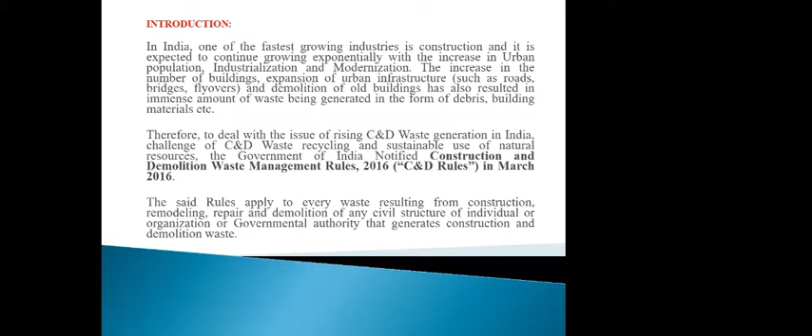The said rules apply to every waste resulting from construction, remodeling, repair, and demolition of any civil structure of an individual - that may be any individual house, organization, or government authority that generates construction and demolition waste. We have to know this rule, otherwise we cannot achieve sustainable management of the environment. To go for sustainable management, there is an act, there are rules, we should follow that, then only we can go toward sustainable life.

So in these rules, what are the objectives? The objectives of the construction and demolition waste management policy - henceforth I will call it C&D waste management policy - are to ensure that no C&D waste is dumped in open space by 2023. As per the rules, wherever waste is generated from construction or demolition, that waste has to be disposed of in a designated area by the end of 2023.

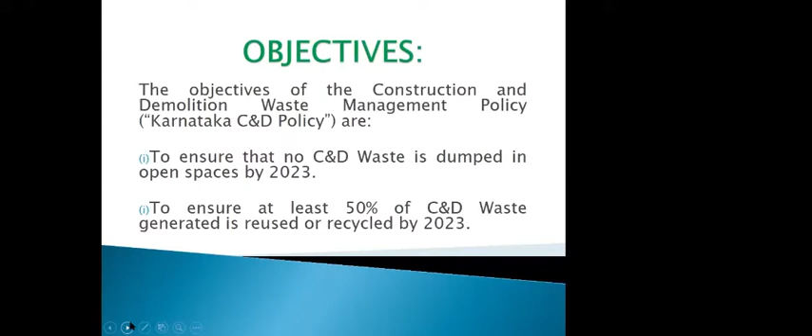Another objective is to ensure at least 50% of C&D waste generated is reused or recycled by 2023. That means a minimum of 50% of the waste has to be disposed of - that is, recycled or reused properly - in a phase-wise manner.

C&D waste impact on environment. Friends, as we know, due to urbanization, civilization and modernization, we are destroying the environment and utilizing natural resources for our livelihood. So what is the impact on environment of this C&D waste? I'll go through it in detail.

Indiscriminate dumping of C&D waste is visually annoying and conveys poor enforcement of C&D waste management in a city, as we observe every day in our city and its outskirts. Due to lack of options for dumping in designated sites, low-lying areas, abandoned quarries, vacant plots, or sometimes even the outskirts of the city often become targets for dumping debris from construction and demolition waste, in the city or outside it.

Often C&D waste is dumped on roadsides quietly by C&D waste generators. Whoever generates the C&D waste simply disposes it in a nearby vacant place, all along the roadsides, or along the backside of rivers.

Private contractors remove waste to privately owned low-lying land for a price. For example, if I am going to construct a small house, whatever waste is generated during demolition or construction, I will give it to a private party, a truck or tractor operator. That person, for the sake of earning money, will go and dump it on vacant land or vacant sites, or all along natural canals, or more commonly dump it in an unauthorized manner along roadsides or other public land.

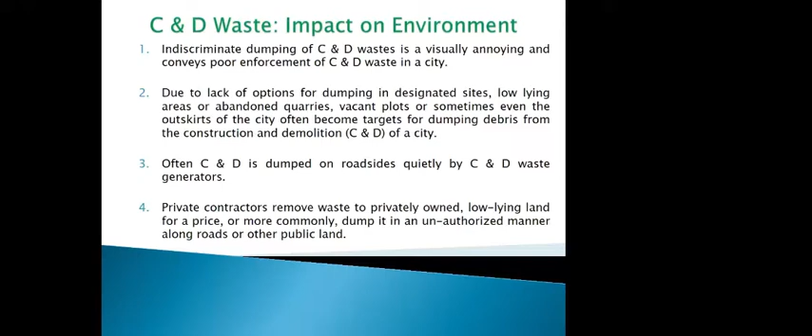C&D debris - that is, waste - is being indiscriminately disposed along river banks or dumped in drains, that is, natural nalas, which hampers flow, thereby encouraging mosquito breeding due to stagnant sewage or water, or causing floods.

Sometimes a person unknowingly disposes solid C&D waste along natural nalas. During the rainy season, it obstructs the natural flow, which may lead to floods.

Cases of reported C&D waste are used to illegally fill up water bodies and wetlands around urban centers for creating land for real estate development. This is something we hear about every day - land developers filling nearby unauthorized lakes, meaning lakes that nobody even knows about.

So that fellow will fill the debris year by year, and one fine day he will say that this is my land. Afterwards he will create a land for selling to some of the people, and there are disputes - this is what we are observing day to day in our surrounding areas.

C&D waste forms a part of solid waste, municipal solid waste. This C&D waste is a part of the solid waste, and it gets disposed in landfills. That means the municipal solid waste also contains this C&D waste, as this is the cheapest option for disposal of C&D waste.

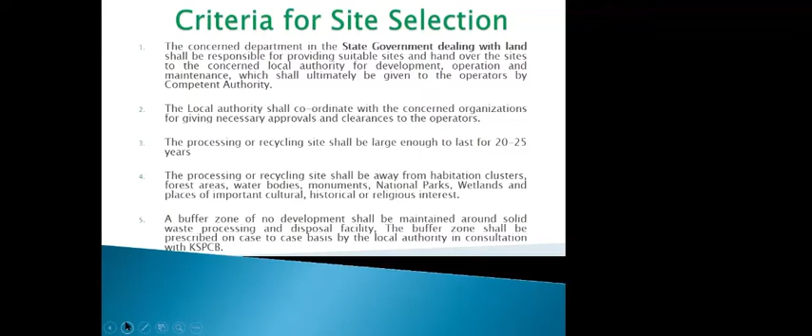A buffer zone of no development shall be maintained around the solid waste, that is C&D waste processing and disposal facility. That means we have to keep a buffer zone of maybe 500 meters or 1 kilometer, depending upon the city, so that there shall not be any obstruction to future development. The buffer zone shall be prescribed on a case-to-case basis by the local authority in consultation with the concerned state pollution control board.

The site shall be fenced or hedged and provided with a proper gate to monitor incoming vehicles or other modes of transportation. That means the proposed site shall be fenced, and we have to provide a gate - whatever waste comes in the trucks or lorries, we have to note it down at the entrance gate.

Provision of a weighbridge is more important, because this is a business criteria involved - any truck that comes with the C&D waste has to be measured properly, and based on the ton basis, the processor will charge the amount. So for that purpose we need a weighbridge at the site, and fire protection equipment and other facilities shall be provided in the site area.

Utilities such as drinking water and sanitary facilities are most important for day-to-day activities in the processing area, and lighting arrangements also need to be provided by the operators during night hours.

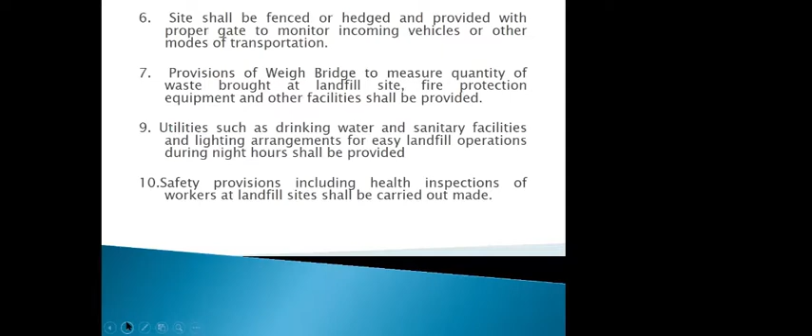Safety provisions, including health inspections of workers at landfill sites, shall be carried out, because before operating the site we have to measure the health aspect of the workers - after some time it may affect their health. So that is also very important.

In order to prevent pollution from processing or recycling operations, the following provisions shall be made, namely provision of storm water drains to prevent stagnation of surface water.

In the processing area, during rainy season, water should not be stagnated causing water pollution. We have to ensure proper storm water drains are provided in that area. Provision of paved or concrete surface in selected areas, not the entire area, has to be provided so that dust mitigation will be avoided in the processing area.

Prevention of noise pollution from the processing and recycling plant is important, since this is a concrete waste processing site that generates noise. We have to keep in mind reduction of the noise level, and provision for treatment of effluent, if any, to meet discharge norms as per the Environment (Protection) Rules, 1986.

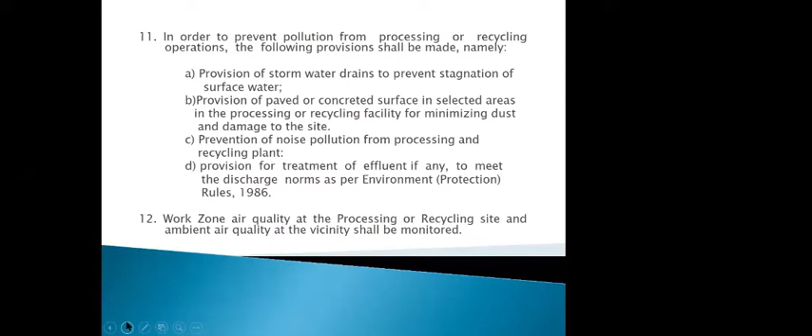So we can ask, what is the treatment plant and why is it required? The waste contains other material, so it has to be washed off properly, or segregated into sand, cores and other things. We need treatment plants, and if any effluent is generated, it has to be treated properly and recycled back.

Work zone air quality at the processing or recycling site, and ambient air quality in the vicinity, shall be monitored. A vegetative boundary is a most important part of site selection, and after selecting the site area, a vegetative boundary of 4 to 5 rows in a zigzag manner plantation has to be provided. We have to select fast growing species native to the region so they adapt to the particular area, with thick canopy cover, preferably perennial plants.

The following projects shall be exempted from the norms of pollution from dust and noise as mentioned above. For construction work where at least 80% of the construction and demolition waste is recycled or reused in situ, that means for a very big project anywhere in the city, if the project proponent is going to recycle the waste back, it will be exempted from those norms, provided sufficient buffer area is maintained.

It should not affect the surface.

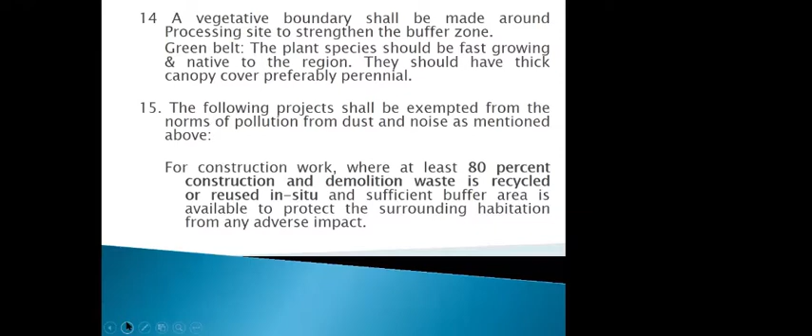So friends, why am I telling all these rules? Now I am going to tell you about the consent and authorization required for C&D, that is construction and demolition waste processing facility. In entire India, there are State Pollution Control Boards, which have already categorized industries as red, orange and green category based on the potential for pollution. One more category recently declared by the Central Pollution Control Board is white category - those industries are not required to have any consent. The C&D waste facilities come under orange category, that is medium polluting activity.

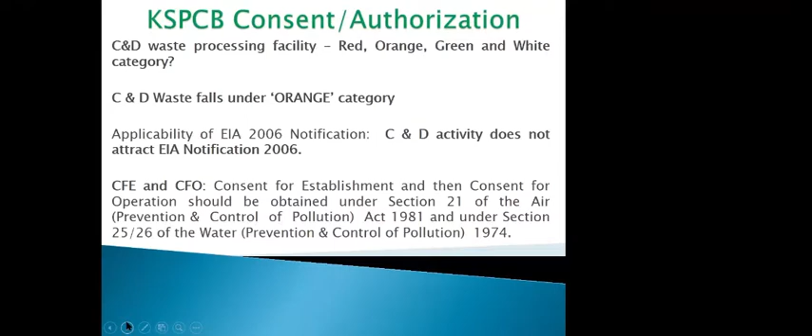Applicability of EIA, that is Environmental Impact Assessment 2006 notification, is not attracted for this project. CFE and CFO - what is CFE? CFE is Consent for Establishment, that means prior to or after identification of the land. So I have actually started explaining how to apply and obtain consent from the State Pollution Control Board. The activity comes under orange category, and CFE and CFO is required for the facility. The unit of the facility, as specified in the sub rule, shall apply in Form Number 1.

That form number is available, and as per that they have to fill the details and enclose all the enclosures and apply to the pollution control board. The pollution control board officers will internally visit the site, and if satisfied, will give the authorization in Form Number 2. The local body authority shall prepare an annual report in Form 3.

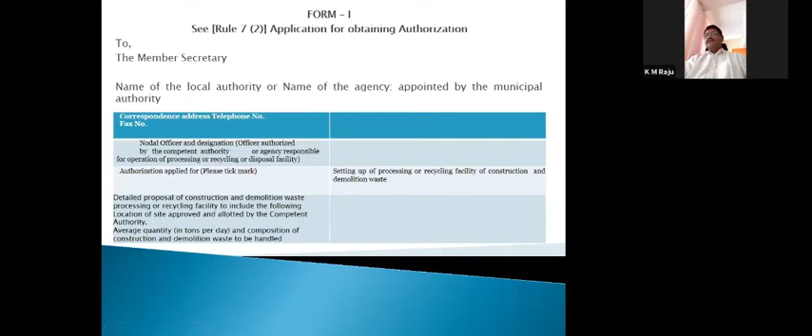That is the next procedure - every year the local authority has to submit an annual report, that means what waste is generated, what quantity, how it has been disposed of and how it has been recycled back, all details are available. They have to fill in the annual report and submit it, and in turn the State Pollution Control Board will submit the details to the Central Pollution Control Board in Form Number 4.

Friends, I would like to tell you briefly about guidelines on environmental management of C&D waste.

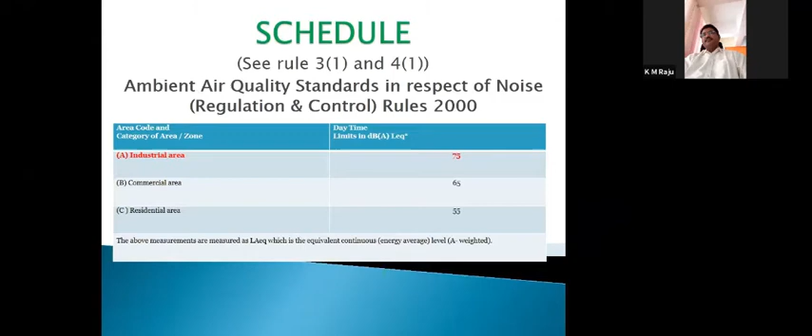This is regarding air pollution. While handling this activity, dust emissions arising from C&D activities are an environmental nuisance both within the site and beyond the plant site or boundary. Dust from various C&D activities releases a wide range of particle sizes and material types, and can cause serious health problems ranging from eye irritation to nose, mouth, and respiratory problems. The larger heavier particles settle out of the air quickly and are a hazard to the operators.

During operation of the plant, large particles are emitted from the processing area and may affect the operators. The smaller particles can carry for kilometers and may affect the surrounding premises and habitation.

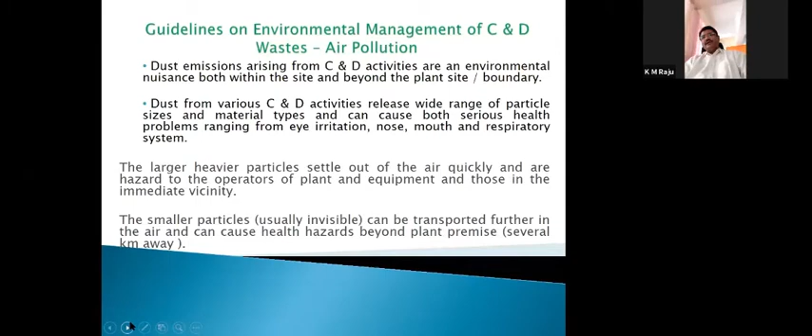Air pollution mitigation in C&D operation. How to mitigate the air pollution? Areas should be earmarked for delivery or deposition of C&D waste. At the processing site, we have to earmark where the incoming waste should be dumped and how the processed material is handed over. Also, a sheet cover over the debris—whatever the dumping material is, we have to cover it with a zinc sheet or something to avoid carrying dust to the environment.

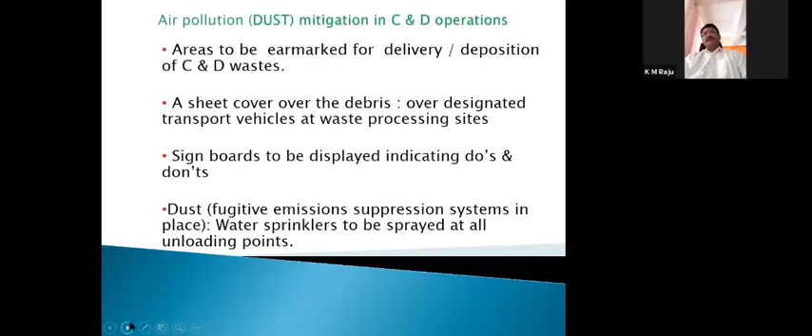Designated transport vehicles at waste processing sites. Signboards should be displayed indicating do's and don'ts. A dust, or fugitive emissions, suppression system should be in place. Water sprinklers should be sprayed at all unloading points, and a sprinkling system has to be provided at the site.

This is regarding water pollution abatement measures. Water requirement: water is required for dust suppression, for plantation, for drinking purpose, and also for domestic purposes—it includes everything. Treated wastewater and sprinklers should be used for dust suppression.

Site operators need to demonstrate control of both visible dust and fine particulate dust from activities within their premises. Treated wastewater should be used for washing unloading areas and roads to suppress dust. Treated wastewater can also be imported from other STPs for dust suppression—meaning wherever treated water is available from nearby city sewage treatment plants, that water is enough for use in our sprinkler system instead of fresh water.

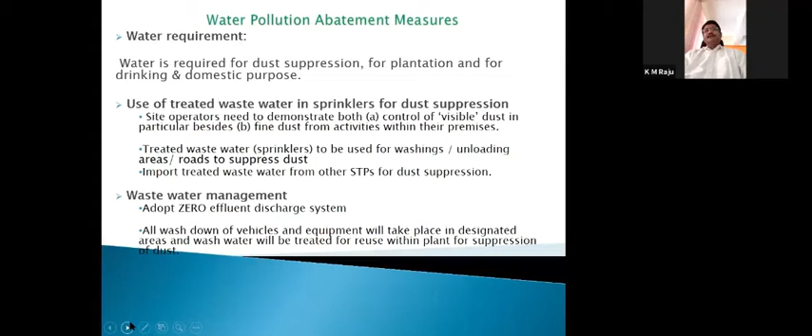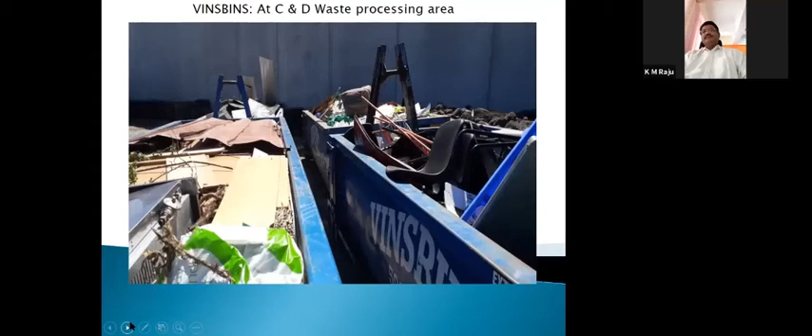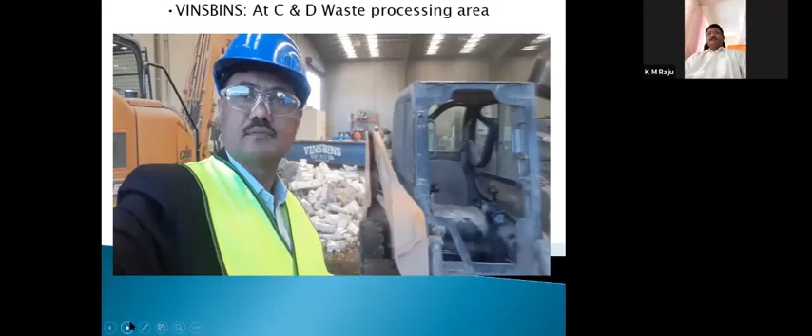This is one VINSBINS C&D waste processing area. You can see the closed shed and maintaining equipment. This is also one of the segregating areas, where you can make out that in one bin there is only POP material, and steel material, cement material are separated, and steel parts are also separated.

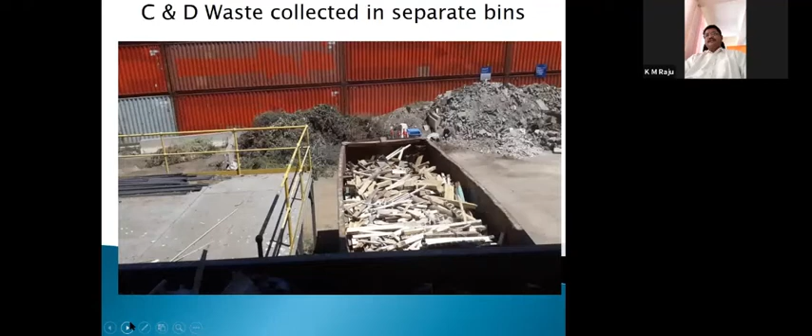That compound wall is made up of second-hand material that is removed from the building.

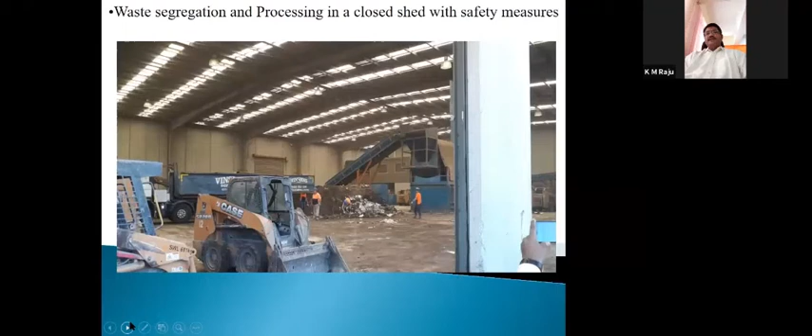This is one of the C&D processing sites. This is actually what we needed. In India, we are not provided with a system like this - we are openly handling it in open areas, which may cause harm to the surrounding area. Here there is a shed provided by the operator. We can make out the proper sunlight arrangement without providing any electrical system, and the conveyor belt system, crushing system, and these vehicles. We can also see how the operators wear gloves, helmets, and shoes. So this is the real picture of the C&D waste processing area.

This is also, as I already told you, the compound wall provided around the processing area made with second-hand materials.

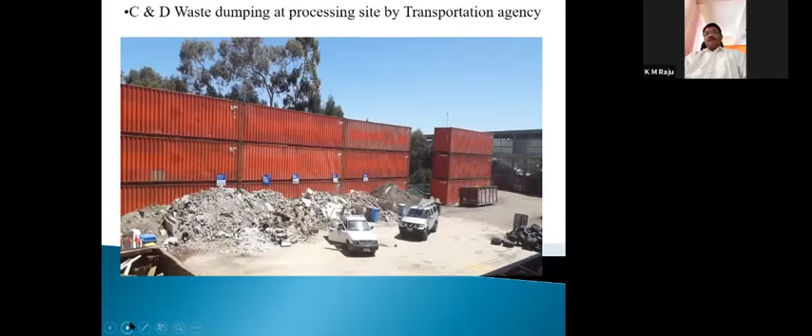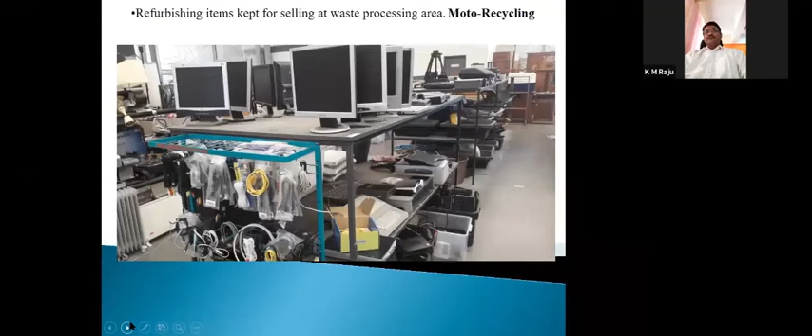In this slide, you can make out the vehicles which are carrying C&D waste from the city, like in municipality solid waste management in our cities. The designated vehicles are provided particularly for bringing C&D waste. This is also second-hand materials which are carried and taken from the demolished buildings, available for any persons going to utilize it. This is one of the dustbins.

The same dustbin has been carried from the demolished building. It contains, as you can make out, all sorts of debris including C&D waste and plantation materials - twigs, wood, and everything. So after reaching the site, they will segregate it properly, and as per the available material, they will sell it for recycling to the metal industry and reprocessing industry.

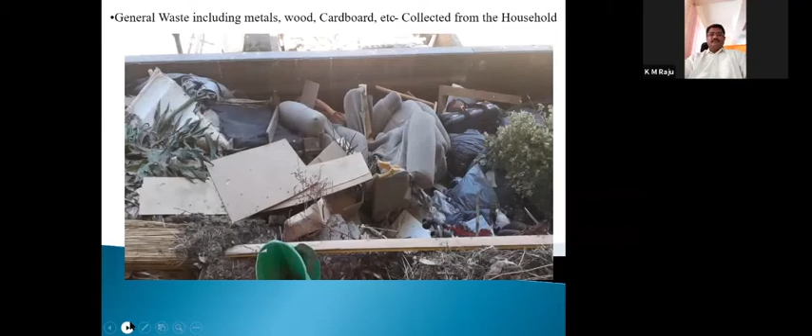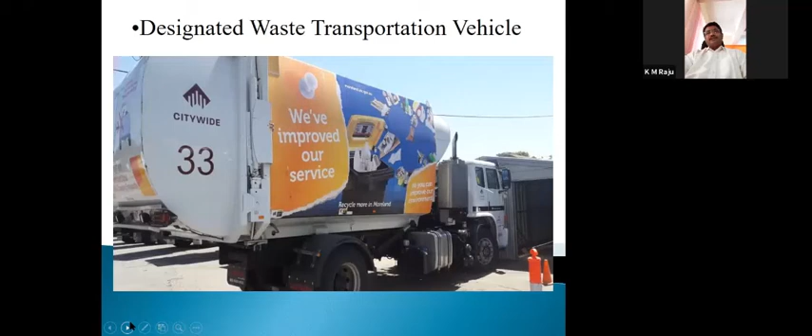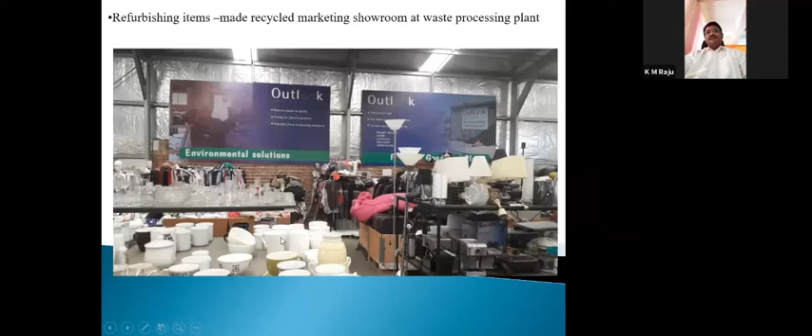In this, we can make out the beds, what we are using in residential houses or lodges or somewhere. So a person who is going to demolish a building in Melbourne or abroad will hand the entire building out to the C&D waste processor. That means whatever materials are present in the building, that fellow will collect all sorts of materials. But what about in our states in India - we used to sell all the materials except only the bare building. So this is not the right approach. Whatever waste is present, as it is, in its present manner, it has to be handed over to the C&D waste processor. That fellow will separate it, segregate it, and sell it to other types of industries for another process.

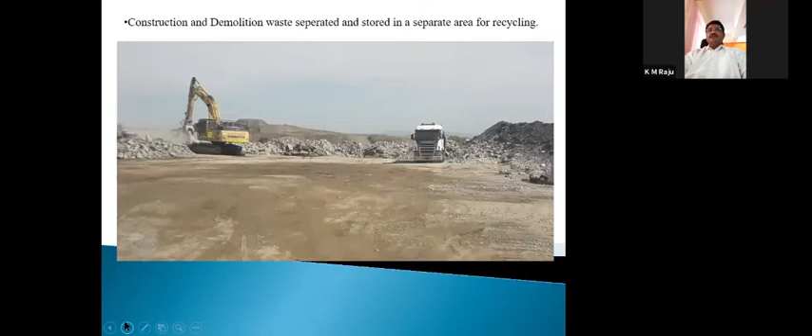After that, the concrete will be separated and all sorts of jellies and other things will be heaped in a separate manner. This is the steel separated from the concrete. Next.

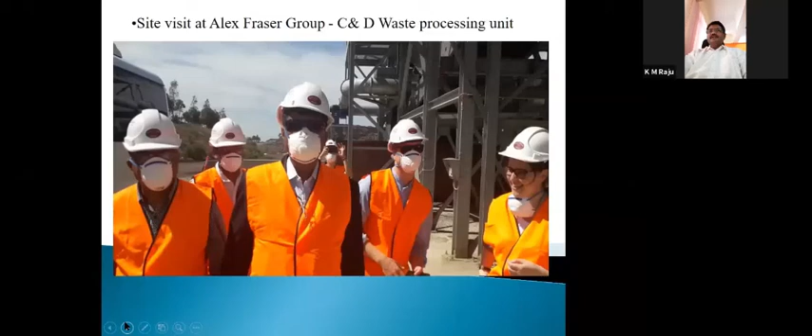Myself and the officers from various parts of India visited Melbourne. This you can see in a proper way so that you can understand how the plant is there, how whatever boulders or concrete waste comes from demolished buildings will be processed. This is the processing plant.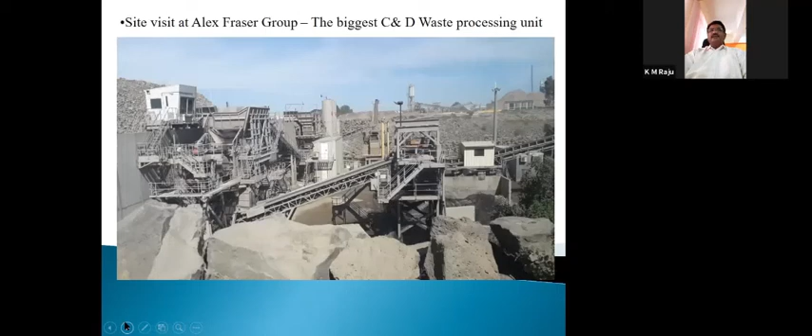They will feed the material into the jaw crusher. Then the plant works and separates it; dust, debris, sand, everything will be separated in a proper way. This is also one part of the C&D waste processing unit.

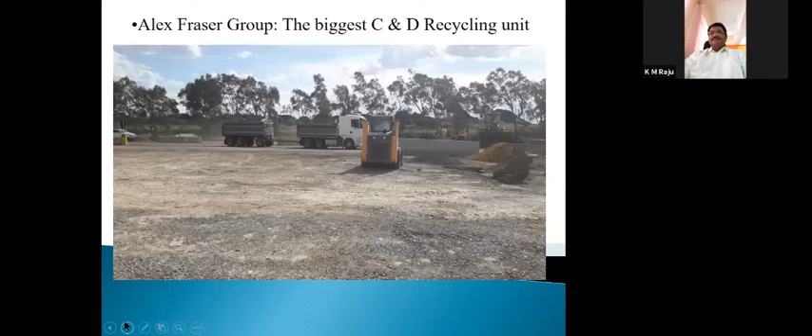This is one of the refurbishing units. Anybody can come and buy second-hand materials. Like in India, they also sell second-hand materials instead of wasting or crushing. This brown color you are observing is wood chips. Whatever waste wood comes along with C&D waste, they make into smaller chips, and it is used in gardens to look very nice.

Before thanking our department and Srimati Rekha, I would like to brief about the present scenario in India. You can ask some questions. Presently in India, there is no proper management of C&D waste, except in some major cities. In Bangalore, in Karnataka, only one plant has been set up, named Rock Crystals, on 10 acres of land.